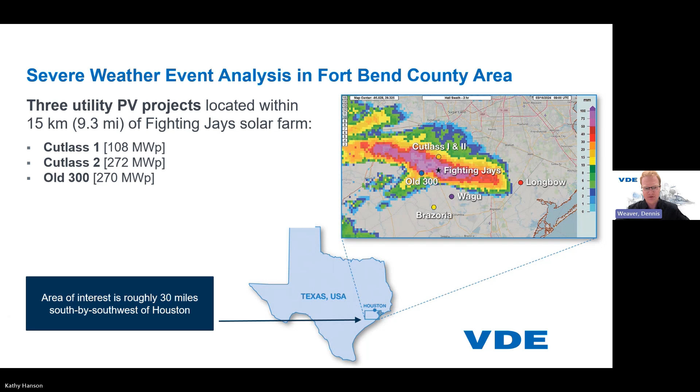So there was actually a severe thunderstorm that came through earlier in the afternoon on March 15th, about 3 o'clock local time, that passed just to the north of Fort Bend County and the projects that are outlined in the image on the slide. That storm didn't really have an impact on this particular area, and we're not going to dive into that. But there was another storm that occurred on the 15th from right around 5 to 6:30 local time. And that's what we're looking at in this particular image.

So this is what we call the maximum estimated size of hail, or MESH. It's a radar-derived product. So the way I like to think about it is, I think we're all familiar with our radar reflectivity values that show up when you look at radar on your phone, or if you're watching a weather broadcast. Basically, what this represents is a conversion of those values into a hail size estimate based on where we know within a cloud that hail is likely to grow.

There's a couple caveats with using this particular product, one of which is that we know that especially at large hail sizes, it tends to overestimate a bit. And I'm going to talk a little bit more about that later. The other is that there's a slight spatial uncertainty. And the reason for that is we're scanning through a cloud and we're making an estimate of hail size at the cloud level. Well, as the hail falls towards the ground, it's being impacted and affected by the wind field that it's falling through, et cetera.

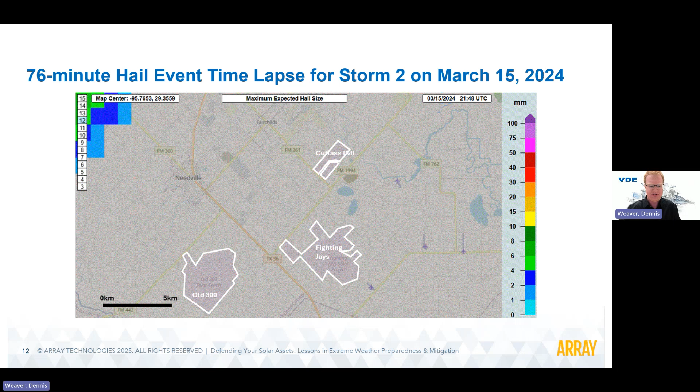And in these particular systems, what we typically see is that the strongest wind at the surface sort of comes from right behind the primary hail swath. And so in this case, sort of out of the slight northwest direction off towards the southeast direction. And one thing that could possibly do is actually shift this primary swath and these higher hail values slightly off to the south and the east, if anything. I mean, we're talking maybe the order of a kilometer or two. And the exact value is not known, and it's going to be storm dependent. But just so we have some background on that.

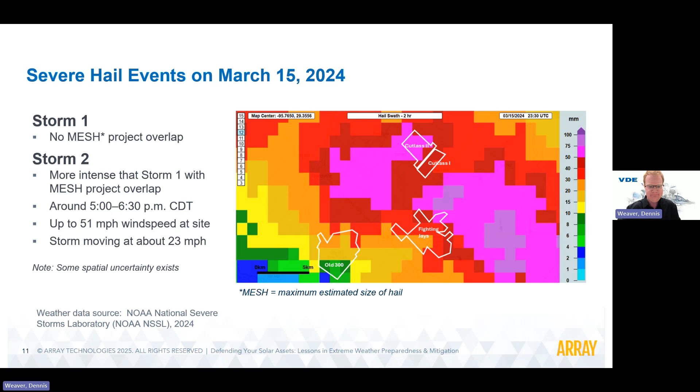We had another storm that came through in the early hours of March 16th. It's a rare storm to get overnight, and I'll talk a little bit more about that as well. But from 2:30 to 3:30 in the morning local time, you can see just looking at the spatial MESH map here, Fighting Jays took a direct hit.

Those estimated values of greater than 100 millimeters, like I said, that's quite likely an overestimate. In this general area, we had observations at the ground of about 2.75 inches in this vicinity. So that's in the 60 to 70 millimeter range, and it does correlate with what we would typically expect that overestimation to be at those large hail sizes.

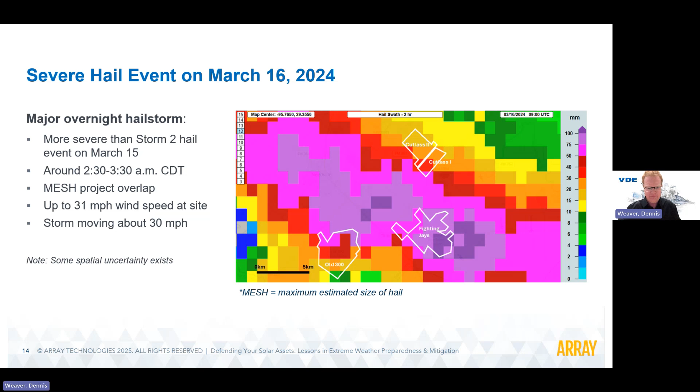So keep that in mind, but we can take a look at the time series for this event as well. Once again, we're dealing with a high precipitation supercell. So in all likelihood, the winds are coming in that very similar direction, out of the northwest slightly, and pushing off towards the southeast.

I'm also going to note here that a couple minutes into this time series, right around 7:50 UTC, so 2:50 in the morning local time, is when we got our first National Weather Service warning for the storm. The National Weather Service warnings always indicate the potential for 1 inch hail or greater. That's the definition that's baked into the severe thunderstorm warning itself.

With the next radar scan, about 5 minutes later, they upgraded that warning to what's known as a severe hail tag. That particular issuance indicates the potential for 2-inch or greater hail, which in this case we did end up seeing in the Fort Bend County area via observations and obviously from this radar analysis as well.

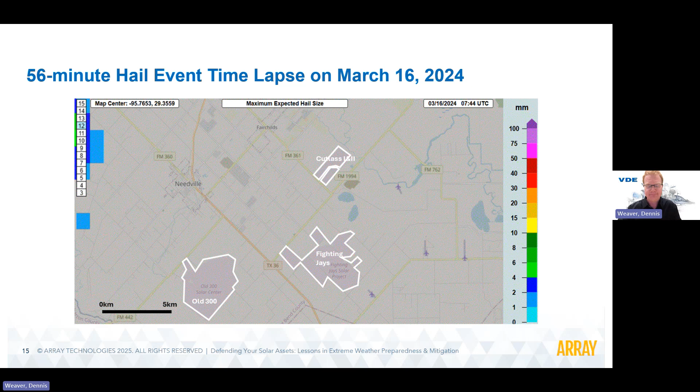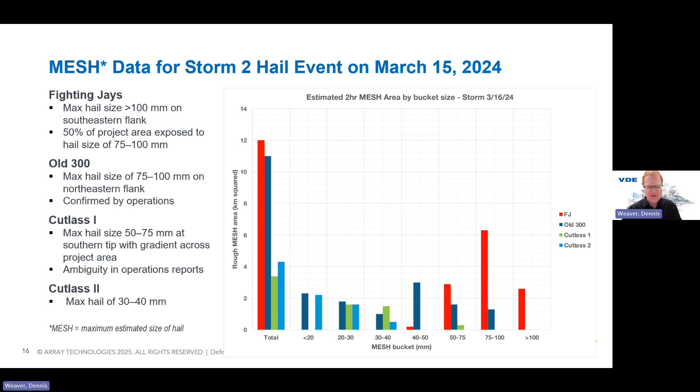We can also break this down by hail bucket size and project area. So once again, in this particular storm, Fighting Jays likely took a larger portion of the hit at the large hail sizes, considering everything above 50 millimeters, but also the Old 300 project experienced several square kilometers that were likely above 50 millimeters based on that radar analysis, the 50 to 75 and the 75 to 100.

You can also zoom out and look at both of these storms in comparison to one another. They did occur within a 12-hour time frame of one another, and I'll talk a little bit about that. But the interesting thing from this particular chart is the observed wind speeds that we had in each of these events. For the event that occurred earlier in the afternoon on the 15th, max wind speeds observed by ground stations were about 51 miles an hour. If we take a look at the observed wind speed at Old 300 during the storm on the 16th, it was about 20 miles an hour lower.

And this really just goes to show, I think it's easy to think higher hail sizes or more intense hail is automatically going to mean stronger winds. There may be some truth to that, but it depends quite a bit on storm relative position. So where are you in relation to those storm dynamics? In some cases, you can get lower wind speeds and still see significant hailfall. Wind is a highly variable variable when we're talking about the meteorological analysis of these severe thunderstorms.

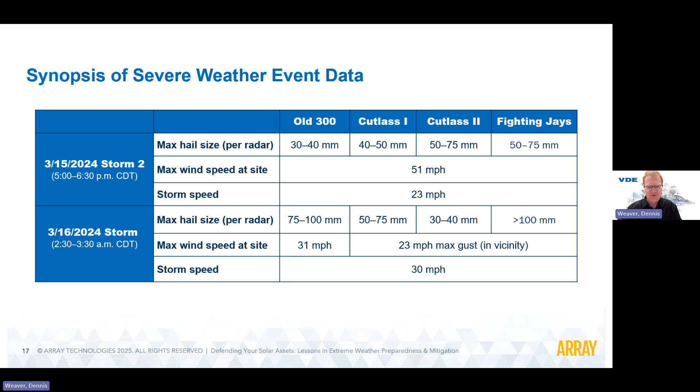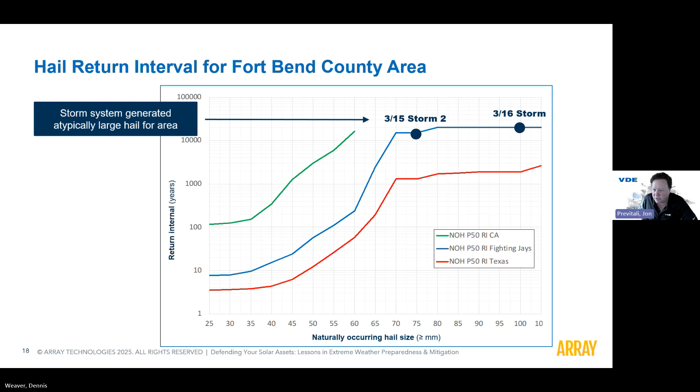And so as Dennis mentioned, we recommend that anyone who is in an area with a return interval for hailstorms that have 45 millimeter or greater hail, a return interval of less than 100 years, take measures to institute hail monitoring and stow, because you can have very damaging hailstorms in those areas. Even if it seems like they're rare, they could still happen. And I also want to really emphasize the importance of hail stow, and also hail stow during construction.

Cutlass 2 was partially under construction, and from what we can tell, the EPC contractor did a good job in putting the trackers into hail stow during construction, even though they were not capable of being put into hail stow remotely because a portion of the project was not energized. And this is a very simple thing for construction people to do. They can simply unlock the tracker mechanism, put the tables into hail stow manually by hand, and then lock those trackers in place in hail stow.

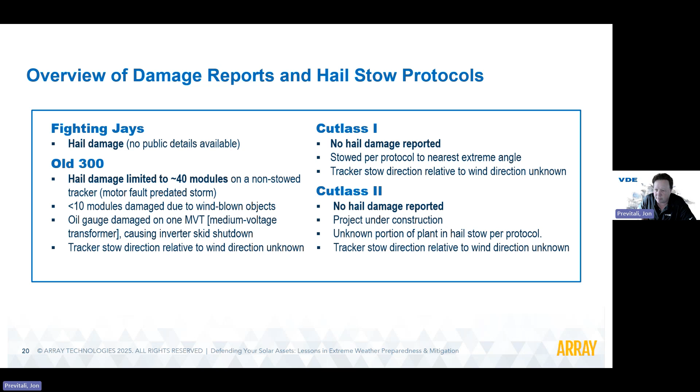Okay, so to wrap up, let me just drive home these points. Hail stow successfully prevented module damage at these projects that were exposed to greater than 1 in 500-year hailstorms. At Old 300 and Cutlass 1 and 2, there was no damage for modules that went into hail stow. The only damage was limited to a table that had a known motor fault that had not been repaired, so it could not go into hail stow. So that's an important point too. Repair those motors as quickly as possible, so you don't have a situation where you can't put the trackers into hail stow.

So even in severe hail conditions, hail stow positioning can significantly reduce damage. The proper implementation of these protocols in collaboration with the operators under contract is really critical, and so is reliable weather forecasting. So having at least a regional alert, but ideally both a regional alert from the National Weather Service and project-specific alerts from private hail alert companies like DTN, for instance, is really important.

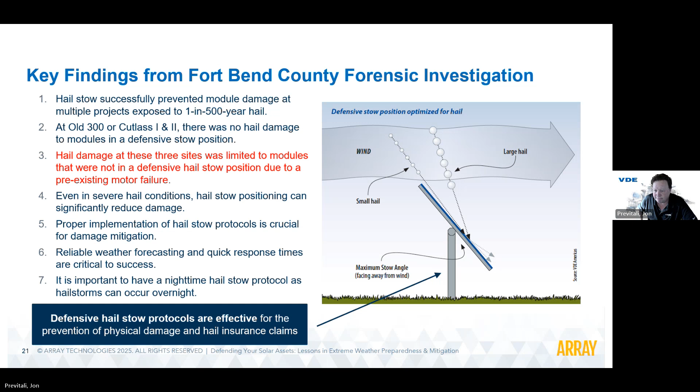And finally, let me just put a plug in for automated hail stow. We see a lot of projects out there that are starting to use hail monitoring and stow, and that's great. There's still a lot of work to be done. In many cases, manual hail stow procedures can be implemented right away, as you would expect. But it really requires that the operators remain extremely vigilant and put the trackers into hail stow very quickly when they receive an alert, and there's human error involved in that. So we really recommend that owners and operators implement automated hail stow that will automatically put the trackers into a hail stow position based on a regional and/or project-specific alert, and then use manual hail stow as a backup.

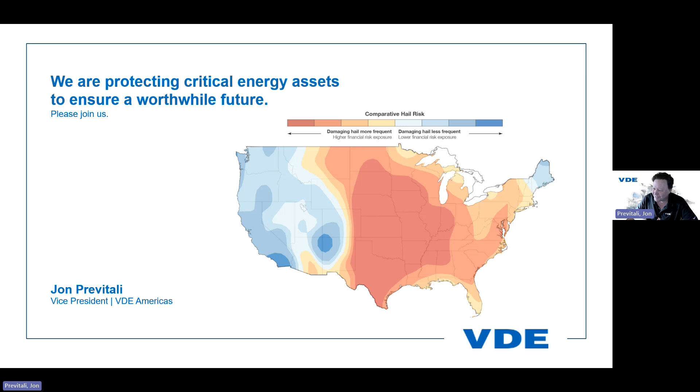Thank you for you and Dennis for walking us through this independent study of the Fort Bend, Texas hailstorms. It clearly showed the challenges of managing hailstorms, and further, these array systems stowed and prevented module losses during these severe and unusual storms. Now, I also want to highlight that these systems were stowed manually by operators using SCADA based on their weather monitoring observations and decision plans.

Now, I want to talk to you about Array's hail alert response that's built on Array's SmarTrack control system. This is Array's automated hail response system. It takes the guesswork away during a live event. Again, as Jon pointed out, there are many things that could happen, including human-driven factors. So an automated hail response is an important part of the toolkit.

First, let's walk through SmarTrack. The SmarTrack system is a supervisory layer built on top of Array's hardware. It offers the functions catered to the challenging demands of today's modern solar trackers that go beyond just moving modules with the sun. So it offers things such as performance improvement, things like terrain adaptive backtracking, and diffuse weather response.

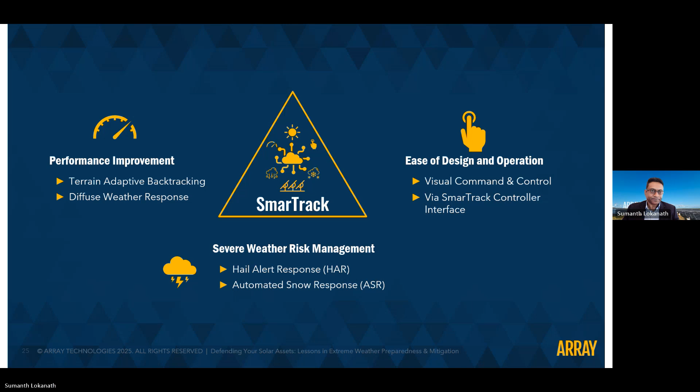Also, ease of design and operation, such as visual command and control via the SmarTrack controller interface. And finally, severe weather risk management, such as the hail alert response and the automated snow response. Now, for the rest of my presentation, I'll focus more on the hail alert response. So this is a very detailed slide, so let's take this piecewise.

Before we dive into the details of hail alert response, let's talk about storm warning systems. Let me direct your attention to the left bottom side of the slide. So we have weather service providers via APIs that allow us to track storms and react based on parameters. In this graphic, the blue is the center of the site, and the red circle is a defined perimeter around the site. So the proximity, direction, and speed of the storms is tracked by the storm polygons that you see. And again, you can have many of these polygons within a storm system.

Now, as you look at the polygons, the rear side of the polygon shows the current location of the storm, and the front short end of the polygon is the predicted position of the storm in 30 minutes. Now, as the moving storm intersects the circle, alerts and actions can be triggered for hail stow. Also, the radius of the circle can be altered to change the time to initiate the stow commands.

And now let's talk about the hail alert response implementation. As you can see on the top right side, the SmarTrack data platform is implemented on Microsoft Azure, so a high reliability platform. So the SmarTrack data platform communicates with the weather service provider. We're illustrating DTN in this case, but you can have a variety of other service providers.

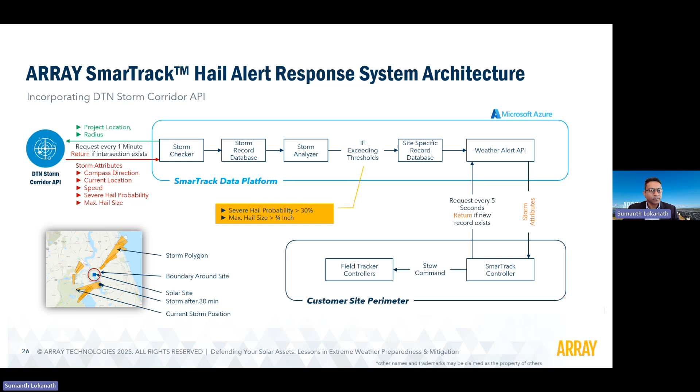Now, another aspect I want to bring your attention to is the parameters that are typically specified by the weather service providers, like DTN in this case. So you get parameters such as location of the storm, the direction of the storm, the speed of the storm, the probability of hail, and the maximum size of hail expected. Now, you can use those inputs and verify them against preset thresholds within the hail automated response, such as the probability of hail, as well as the maximum size of hail that you want the system to react to.

And then beyond that, this slide is talking about key attributes of the hail alert response. Again, in this case, we talked about DTN. We know that both DTN and the Array systems are based on cloud platforms that provide two nines, or actually even three nines of uptime guarantee. And then we essentially can program the parameters into the automated hail response, either max tilt or, as we talked about, things like the probability of hail as well as the maximum size of hail to react to.

But beyond that, we can also program in which direction you want the trackers to stow. And mind you, DuraTrack can handle high tilt stow in either direction and be prepared for hail and wind resilience. So those thresholds can be changed to be more or less conservative, and we recommend recalibrating those thresholds after every storm with actual site event data. Finally, this defensive stow is released 30 minutes after an all clear alert is received from the weather service provider.

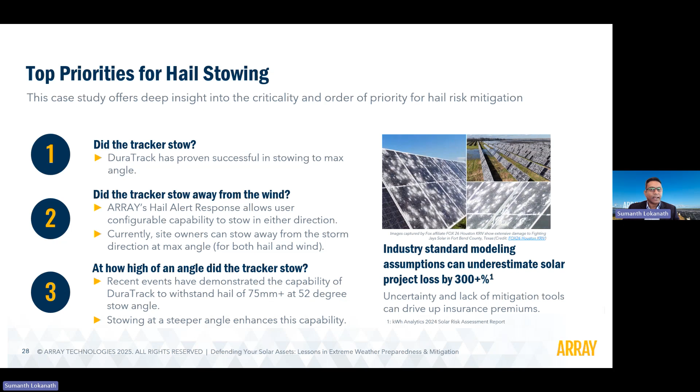Lastly, I want to touch on something that is uniquely Array. Most of you are familiar with tracker operation, where the tracker stows based on wind speeds measured from wind sensors or anemometers. Array is uniquely different in two ways. It has used a hybrid stow on DuraTrack since its inception. The active stow, as you're all familiar with, is sensor, alert, or operator triggered. That's the vast majority. But Array's DuraTrack also has the passive stow that is mechanically triggered by wind pressure the tracker experiences.

Another key differentiator on the DuraTrack from the get-go is it has been designed to stow at the highest tilt angles. This is better explained by a response you're all familiar with. I call it fight or flight. Most other trackers, when faced with high winds, take flight to a lower safety stow. However, the DuraTrack, in contrast, was designed to stow at the highest tilt angle for both forward and backward wind, and it can handle that high tilt in either direction, and that's what makes it very unique.

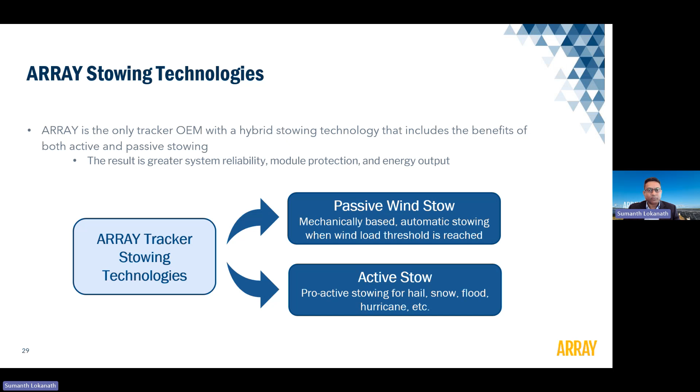And again, what I just discussed is illustrated here. Array's trackers are agnostic to whether a wind or a hail event is occurring simultaneously or one follows the other. How that conflict is managed with other trackers is an important consideration. For us, our patented design solves that conundrum. Now, let me pass the mic back to Kathy, who will take us deeper through the additional value of passive stow.

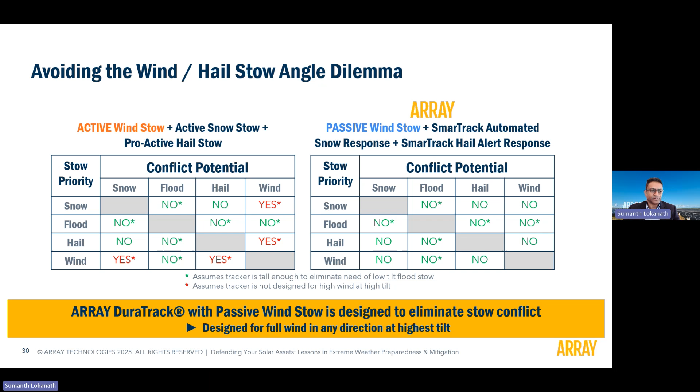So I'm going to talk in a little more depth about Array's passive stow capability. Pretty much what we talked about related to hail is our active stow capability, but our passive stow, as Sumanth said, is quite unique. One of the things the Array engineering team did last year is develop a new methodology and a new software algorithm to model wind stow and its energy loss impacts. The key thing the Array team brought to the table was using very high resolution wind data.

The method that Array developed takes any resolution of data, anything from 1 measurement per second to 1 measurement per minute. The software algorithm averages to a 5-minute interval, and that's what's input into the model, using a high resolution set of data. Most analysis methods today, and quite a few companies do wind stow loss analysis, use hourly wind data, which is significantly lower resolution.

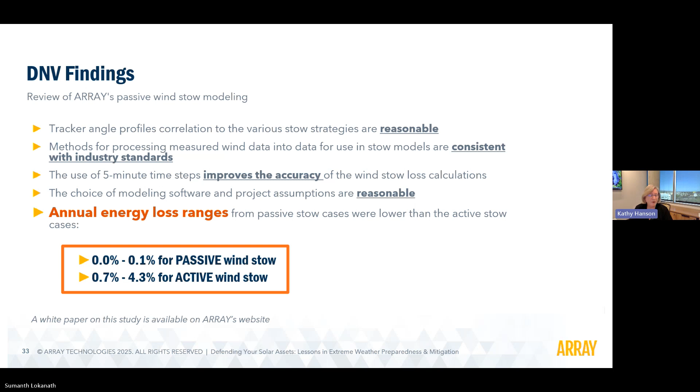Array's passive wind stow benefit, depending on the region of the site, if it's a high wind region, the energy savings per year accumulated over the life of a site can actually ultimately pay for the system itself. And lastly, with extreme weather events increasing in severity and frequency, with data that we've all seen in the industry, Array is introducing a high angle tracker that you may have heard about to bring even greater protection to modules in very severe hail regions.